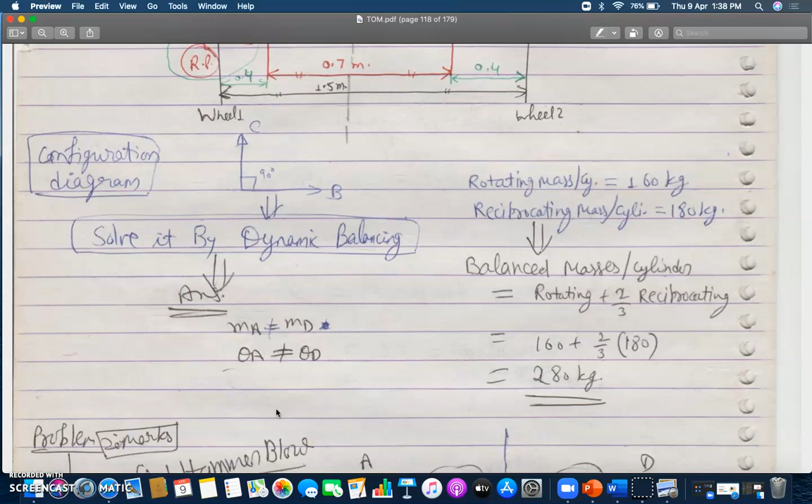Hello my dear students. As we studied in the last lecture about partial balancing, which is primary balancing of two cylinder locomotives, I gave you one numerical to solve with the help of the dynamic balancing technique, which I have already explained in previous lectures.

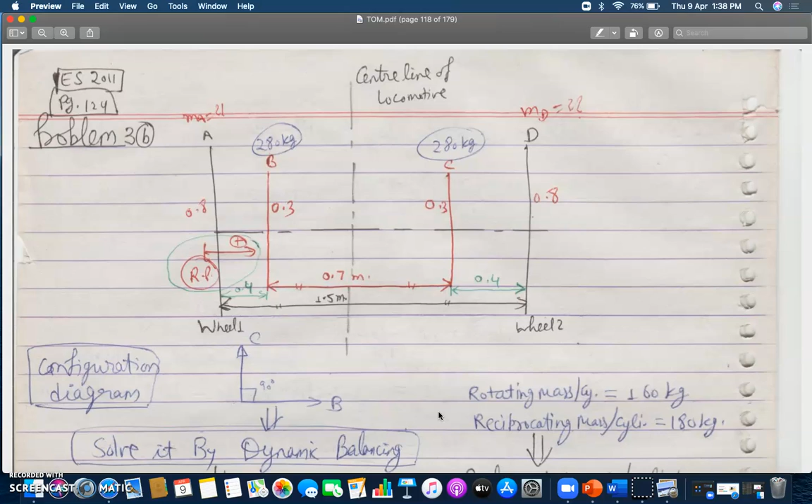To solve this, first with the help of the configuration diagram, you have to prepare a table for the dynamic balancing problem, as mentioned in the picture. You mention the planes, then masses MA and MD, which are unknown, while two masses are known. Then the radius of rotation of all the respective masses at different planes, and then calculate the centrifugal forces, irrespective of omega square.

Omega square is common since the angular speed at all planes is the same, so we are skipping that angular velocity here.

You have to take the reference plane. The reference plane should always consist of maximum number of unknowns. In these two planes, A and D, there are two unknowns. So for the sake of calculation, I have taken the reference plane at A, which is plane number 1. The distance from the reference plane will be 0, and the product of force and L, called moment, will become 0, and the rest you calculate.

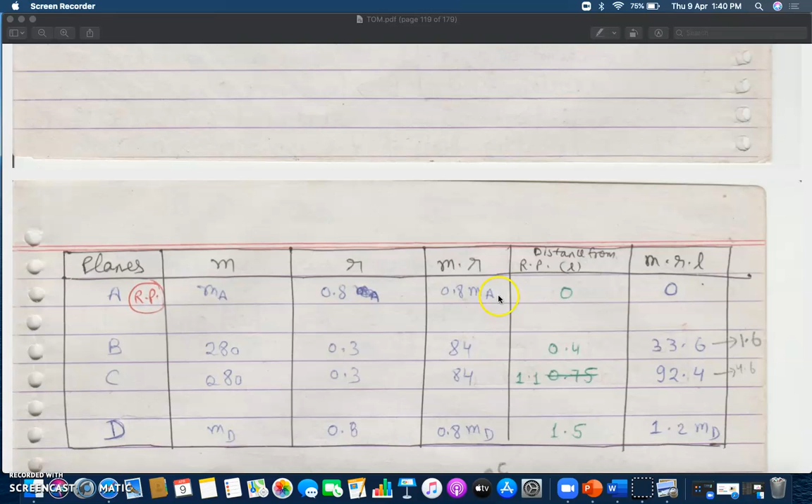Now you are ready with only one unknown, so you draw the moment polygon and calculate the value of MD and theta D. Once you get MD and theta D, put it in the column of forces, then you can calculate the value of MA and theta A, meaning the magnitude of mass A and the angular position theta A.

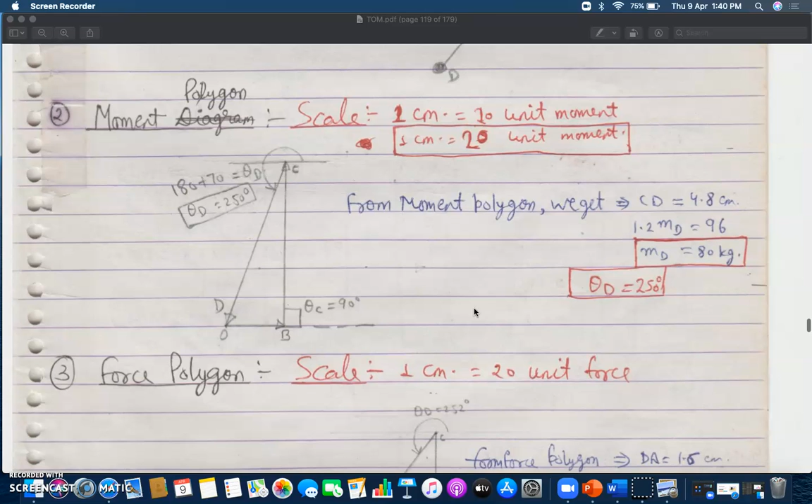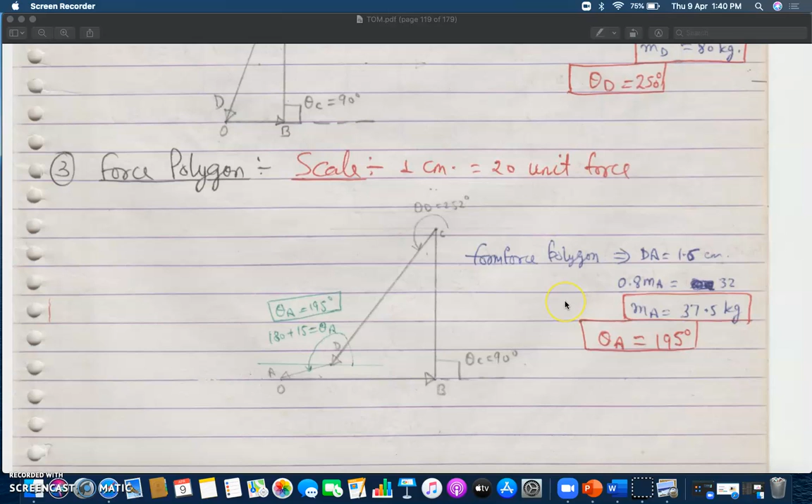So this you can solve with the help of this technique. These are the answers you can cross-verify if you have practiced: theta D and MD, and this is the answer of MA and theta A. These are the four unknowns you have to calculate with the help of the dynamic balancing problem to solve this two cylinder locomotive problem.

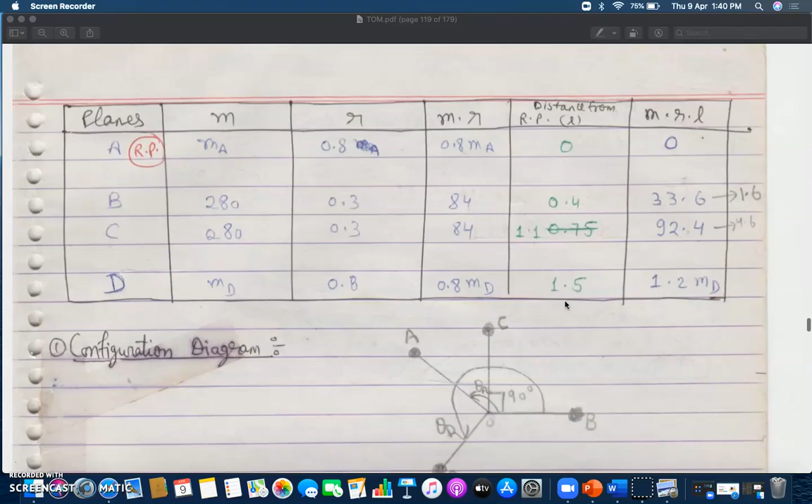Hope you understand, and you can practice many questions with the help of your SS Rattan book and RS Khurmi book.

Now, as I already explained, the hammer blow should always be less than the per wheel static load. If you want to calculate the limiting value of speed, meaning at which speed your locomotive should run, you can calculate omega equals under root P by Bb, where P is the per wheel static load. This gives the limiting value of speed. Sometimes it has been asked in objective question papers that you calculate the limiting speed, where you can directly use this formula.

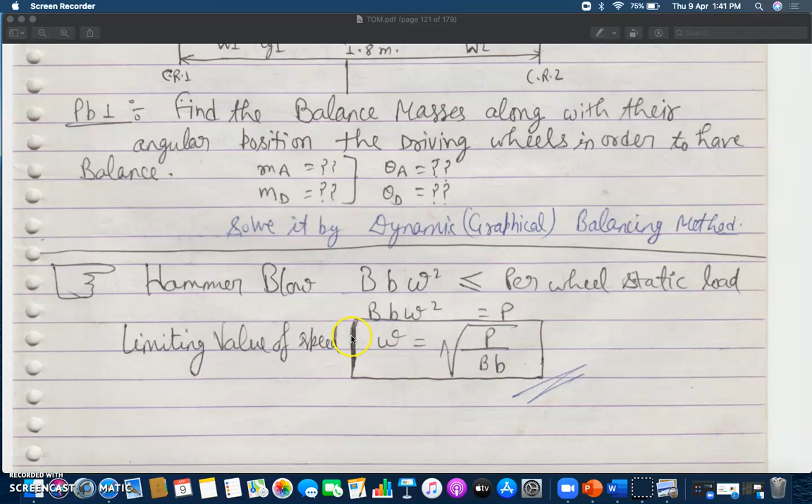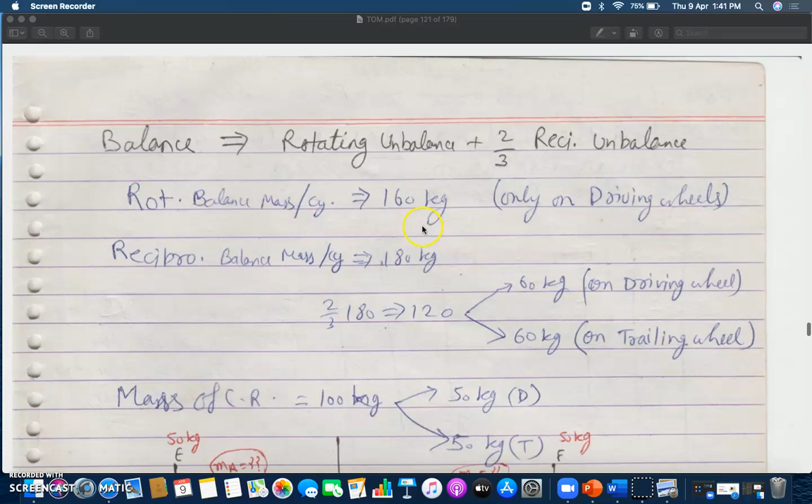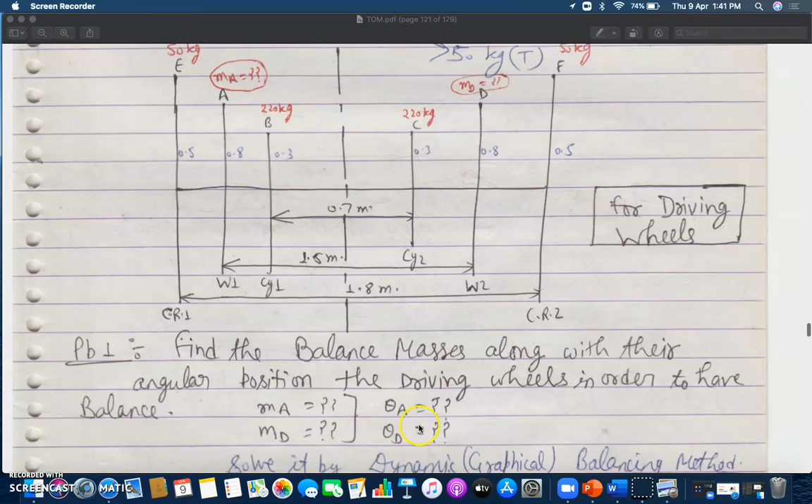If you want to practice questions, you can also note down this problem for your home assignment. You have to calculate the values of the unknown masses. In this problem, rotating balance per cylinder is given as 160, reciprocating as 180, then the mass of the connecting rod is given. This is the centerline of the locomotive, and you have to find the balance masses along with their angular positions, meaning MA, theta A, MD and theta D. This is the same type of dynamic balancing problem. You have to solve it by the dynamic balancing graphical method and get the answers.

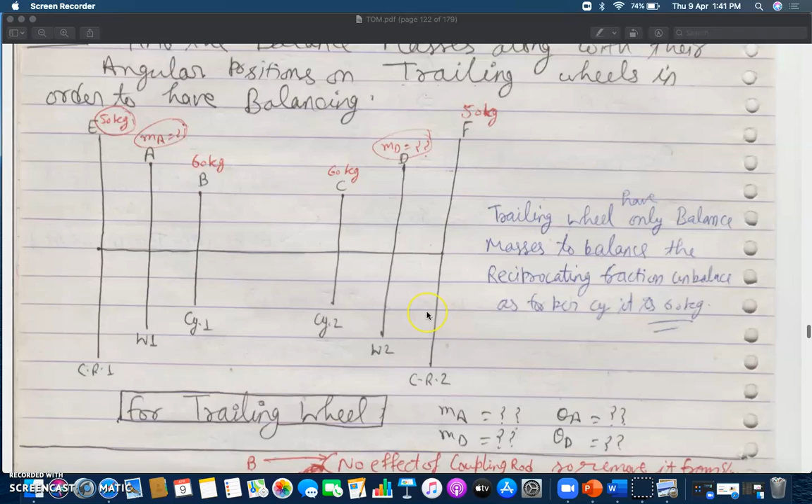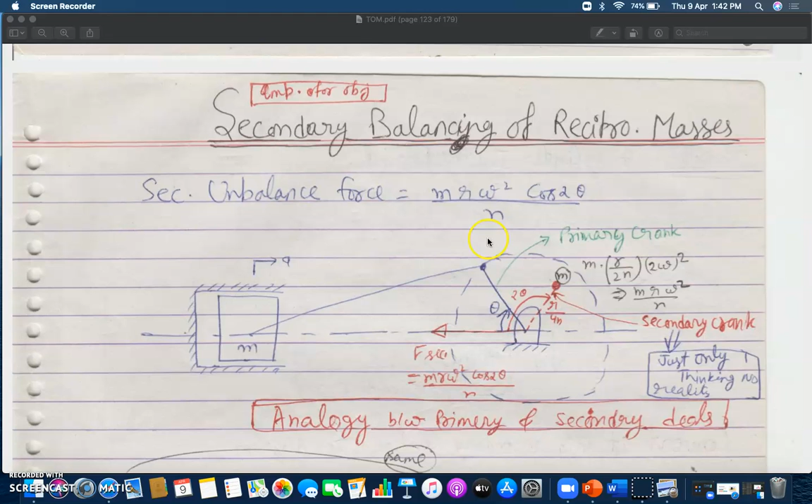Now I am moving towards the calculation of secondary balancing of reciprocating masses, as we explained how you can use secondary balancing of reciprocating masses. This is the second part of reciprocating unbalanced forces. As you know, the secondary unbalanced force can be written as mr omega square cos 2theta by n, which we already saw in reciprocating masses unbalancing.

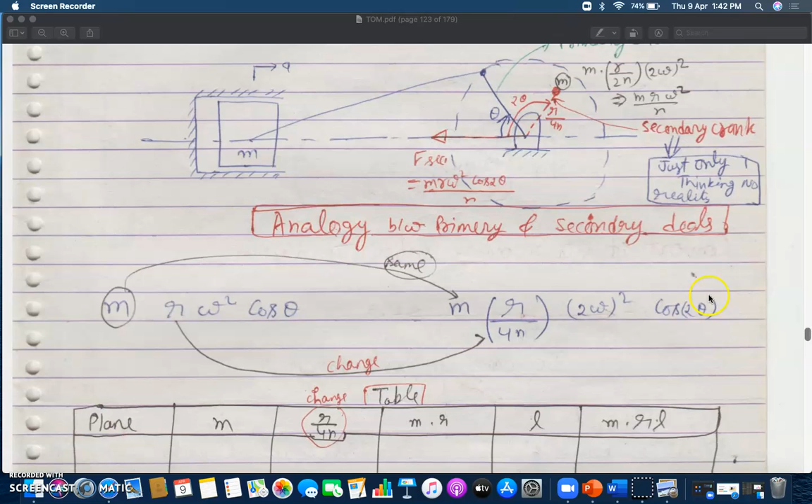So what is the analogy between the primary and secondary forces? The mass m will be same in both, either primary or secondary. But the radius of rotation r will change to r by 4n here, and omega will change to 2omega, and the angle theta in primary becomes 2theta in secondary. So whenever you draw the table, there will be a change in this radius of rotation, and everything else remains the same for the calculation.

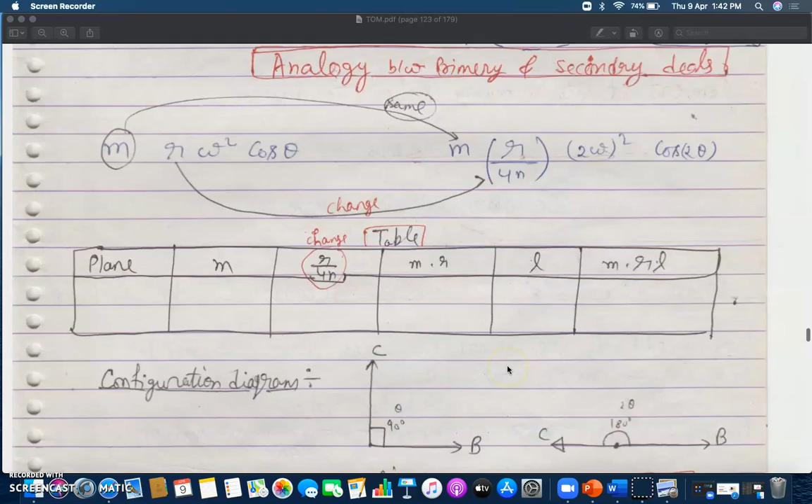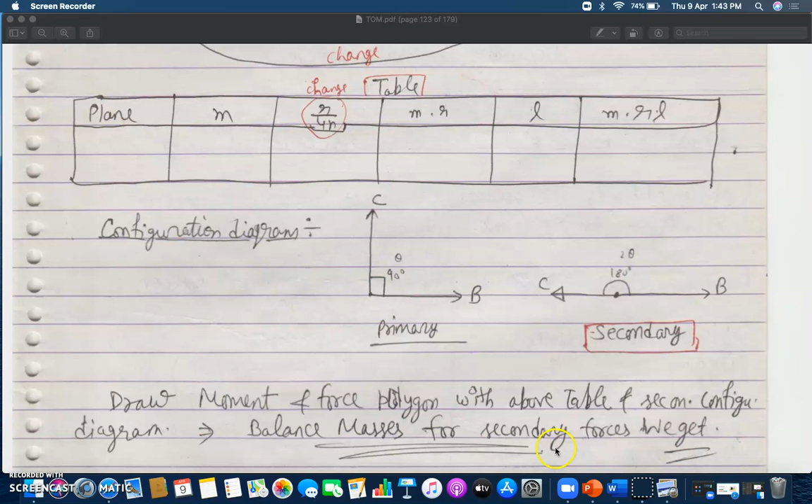In the configuration diagram for primary balancing, the two cranks, planes B and C, are at 90 degrees, meaning the two cranks of the two respective cylinders are at 90 degrees, while in secondary forces calculation it is at 180 degrees, meaning this is 2theta. After that, you draw the moment and force polygon with the above table and secondary configuration diagram, and the balance masses for secondary forces can be calculated with the help of this technique.

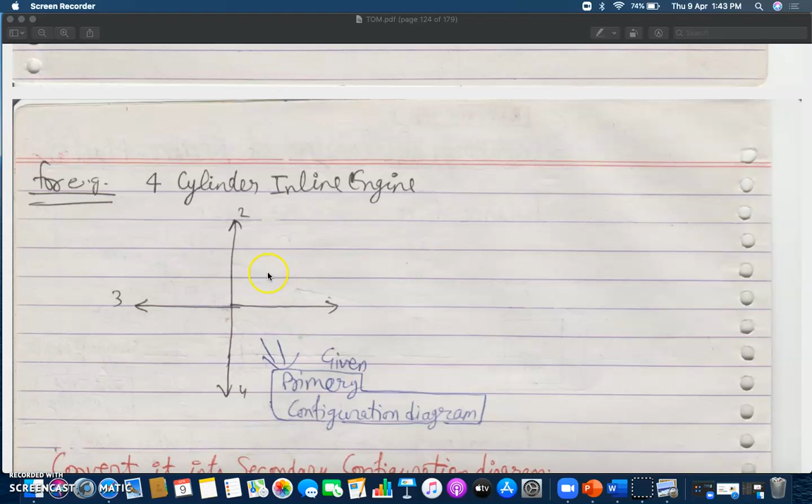Now this is the example of a 4-cylinder inline engine. Right here I have skipped to write 1, 2, 3, 4. All are at a distance of 90 degrees. This is the primary configuration diagram.

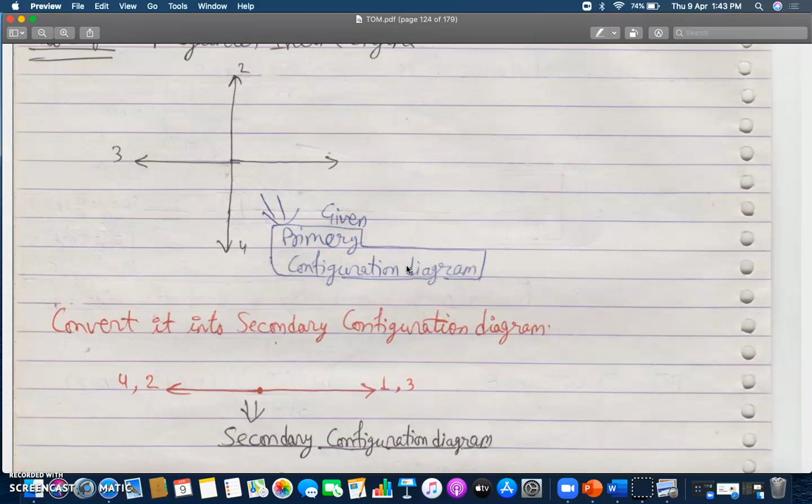If we want to convert it into secondary, then it will be like 1, 2 at 180 degrees, 3 and 4 at 180 degrees. That means all the respective angles of the primary configuration diagram will be multiplied by 2, and it becomes the secondary configuration diagram. This way you can calculate.

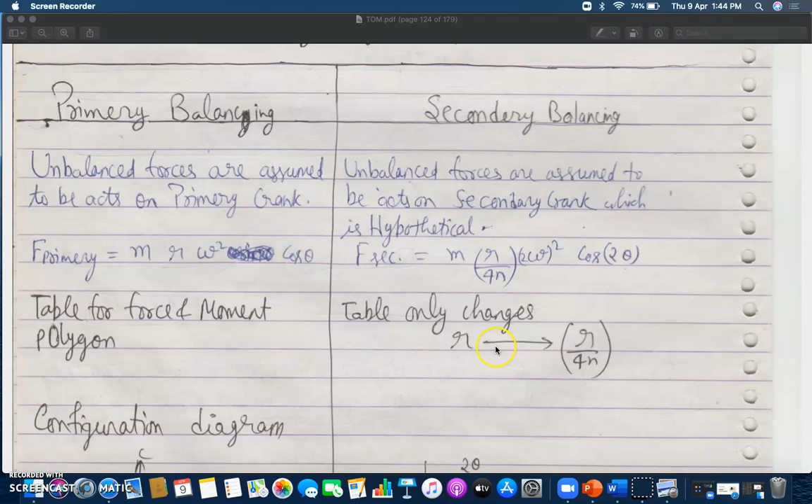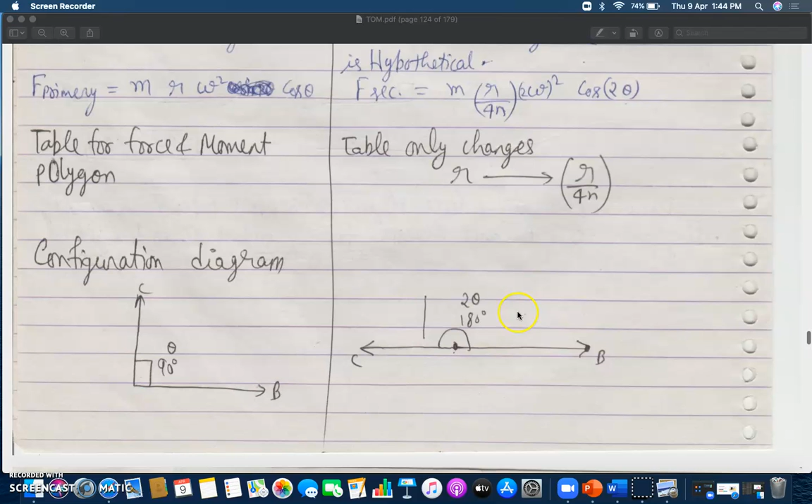The table for the force and moment polygon will be the same as you used to draw in dynamic balancing, but only r changes to r by 4n, and the rest remains the same in secondary balancing. Your configuration diagram will change from 90 degrees to 180 degrees, meaning from theta to 2 theta. So this is the change you get between primary and secondary balancing. Note it down, this will be very helpful for objective questions.

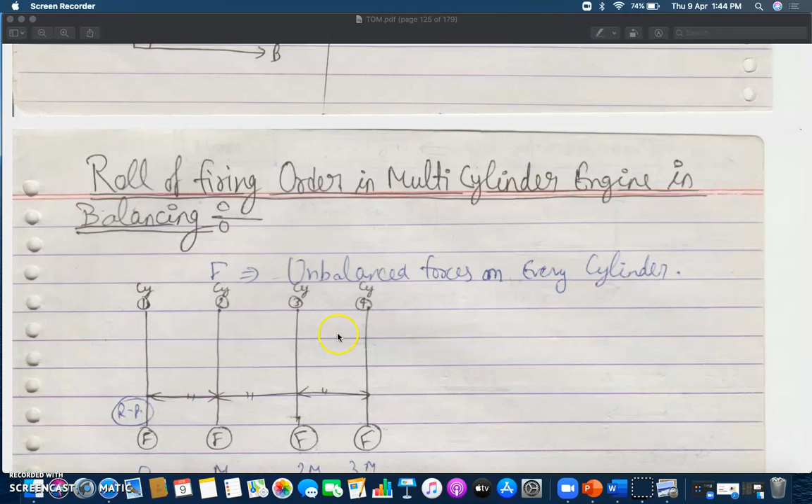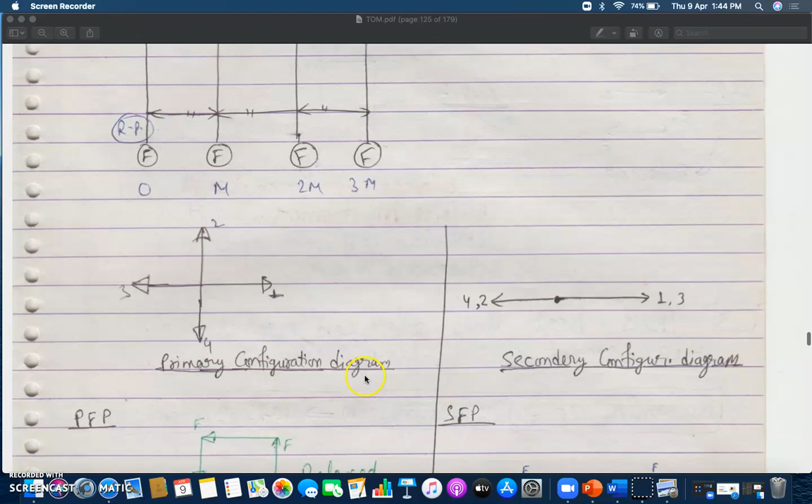Now the role of firing order in multi-cylinder engines in balancing. What is the role of firing order? I will see that if there are 4 cylinders total, then your primary configuration diagram will be like this, and your secondary configuration diagram will be like this, as I have explained above.

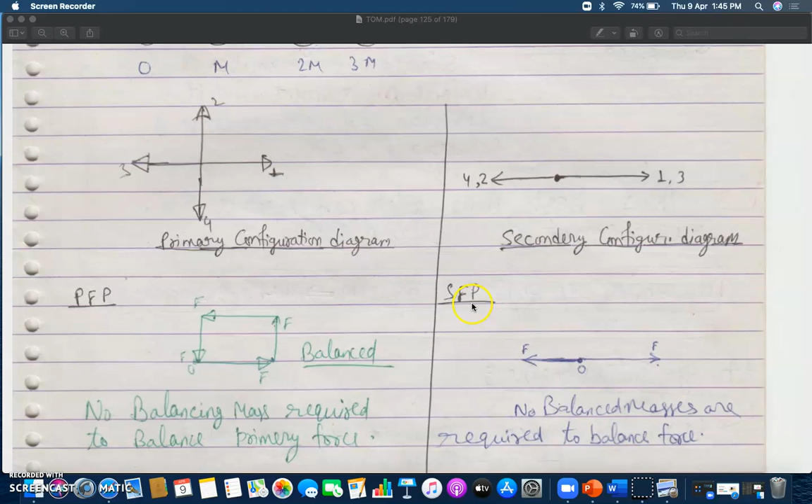So what will be the value of primary forces? Primary forces will be balanced like this, meaning no balancing masses are required to balance primary forces in the primary configuration diagram. Similarly, in the secondary force polygon, no balance mass is required because this is already balanced. Now moving to the primary moment polygon, you will see some balance masses are required to balance this primary moment polygon, and similarly in the secondary moment polygon, balance masses are required to balance the secondary moment also. So here you require secondary masses.

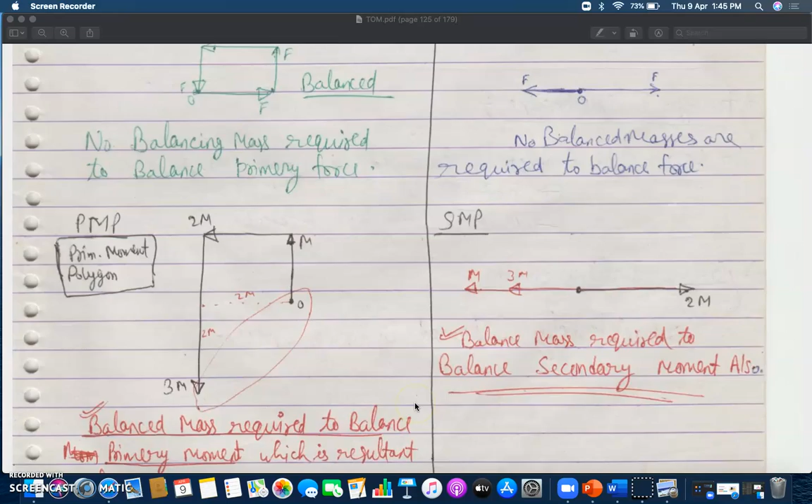So in this way I can say that the best firing order can reduce the requirement of balance mass. This way you can reduce the balance mass requirement if you are using the firing order very judiciously.

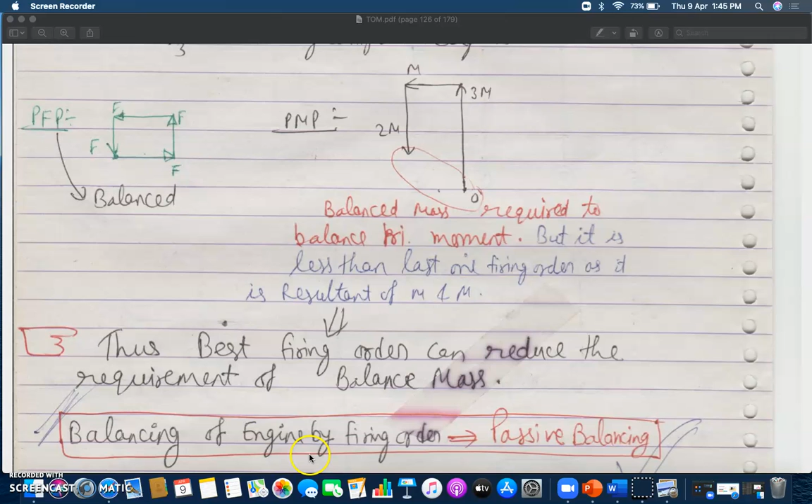So this is the way, and this kind of balancing is called passive balancing. If somewhere they have asked what is passive balancing, you can say balancing of an engine by firing order is called passive balancing.

In 4-cylinder inline engines, primary and secondary forces are balanced, while moments, either primary or secondary, are not balanced. So a 4-cylinder engine cannot be completely balanced by firing order, while 6-cylinder inline engines are completely balanced by firing order. Note this down, that 6-cylinder engines are completely balanced by firing order.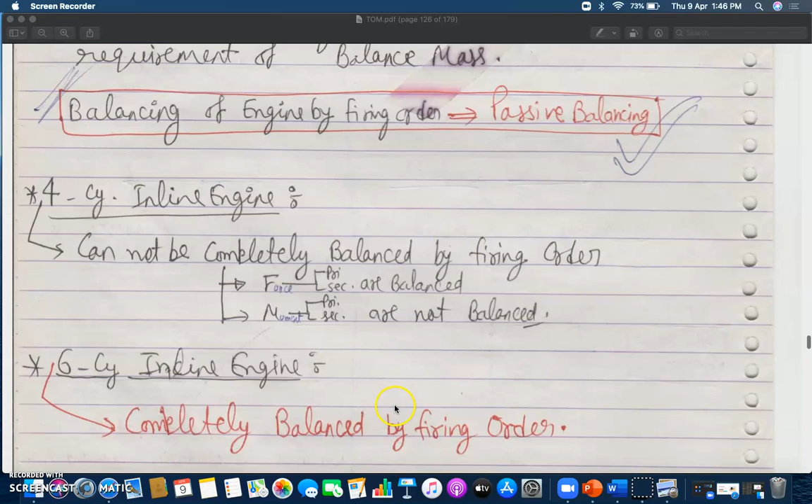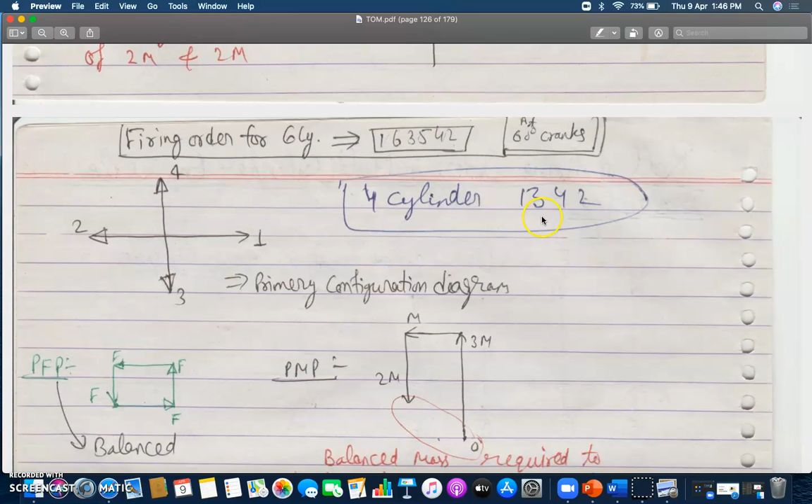If you want to recall the firing order sequence, note it down here. For the 4-cylinder it is 1 3 4 2, and the firing order for the 6-cylinder is 1 6 3 5 4 2 at 60 degree cranks. This means first cylinder 1 will fire, then 6, then 3, 5, then 4, then 2. Similarly in the 4-cylinder, first cylinder 1 will fire, then 3, then 4, then 2. So this is the firing order for 4-cylinder and 6-cylinder engines.

So I am stopping here for now. We will see what is the direct and reverse crank method in the next lecture, which will be the concluding lecture of balancing. Hope you have understood all the basic concepts of primary and secondary balancing, which is part of reciprocating unbalancing, and you have understood rotating balancing of unbalanced masses, which is static and dynamic balancing.

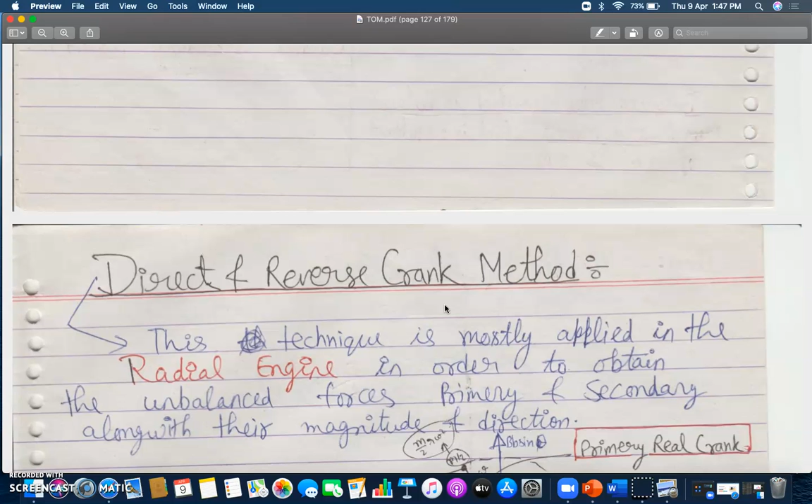Keep practicing. Go to your textbook and find out some questions related to numericals in previous year question papers of university exams and some objectives of GATE and IES, and do practice. Then only you will understand the philosophy behind balancing of locomotives or balancing of unbalanced masses.